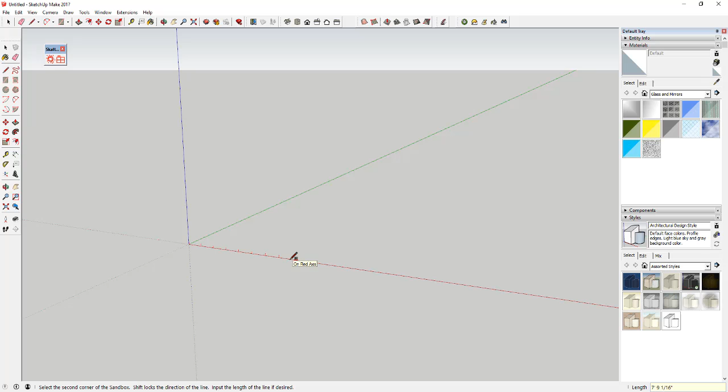So first we're going to use this From Scratch object to come in here and create a grid. I'm actually going to make this a 1 foot by 1 foot grid. You see how in the corner it says grid spacing? I'm going to type in 1 foot and hit enter. Then I'm going to click once, type in 30 feet and hit enter, then move my mouse this way and type in 30 feet again. So basically I came in here and created a 30 foot by 30 foot grid.

Now we're going to right click on this and explode it so that it's actually in here as individual lines and faces and stuff like that. So select this box, right click, and click explode. Now we can come in here and work with this.

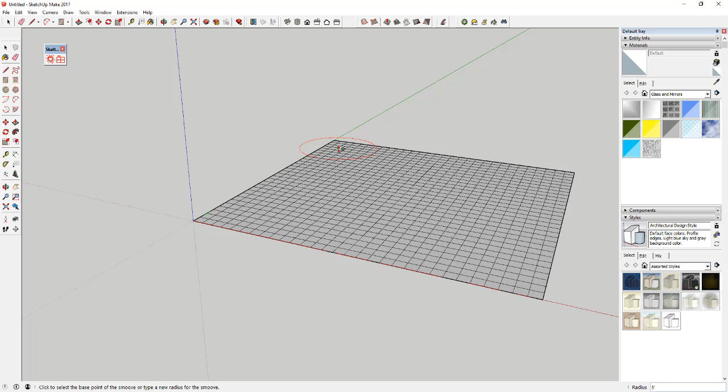The next thing we're going to do is use the smoove tool to come in here and kind of move this up and down. You can see how when I click on this smoove tool, I get this circle, and it's centered on wherever my cursor is, but it's a little big right now. Down here in the corner it says radius of 10 feet. I'm going to type in 5 feet and hit enter, and you can see how the size of this circle gets smaller. So now I can come in and work with this.

All I'm going to do is move some spaces up, some spaces down, creating kind of a landscape looking space. So we'll make some hills, some valleys, that kind of thing, just to make this a little bit of an interesting space. So now this is in here as more of an interesting type landscape, or type terrain.

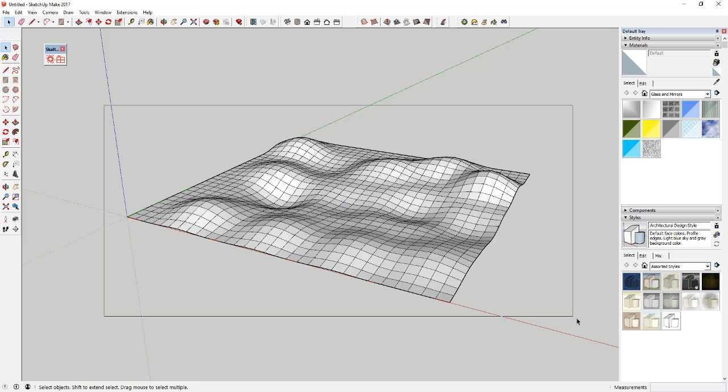So next thing we're going to do is come in here, and what we can do is we're actually going to smooth this. So to smooth this, you're going to select this whole thing, and there's going to be an option in here for Soften Edges in your tray.

If that does not show up in your tray, just come up here to Window, Default Tray, make sure Soften Edges is checked, and make sure that your tray is turned on.

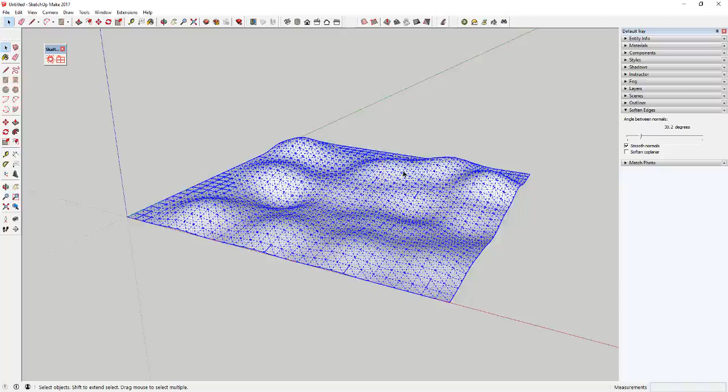Once we've got that, we're going to come in here and drag this little bar up a little bit, just like this. You can see what this does is it smooths this into a single face. If I was to triple click, you can see how it's still got all this geometry in here, but it's set as softened and smooth geometry right now.

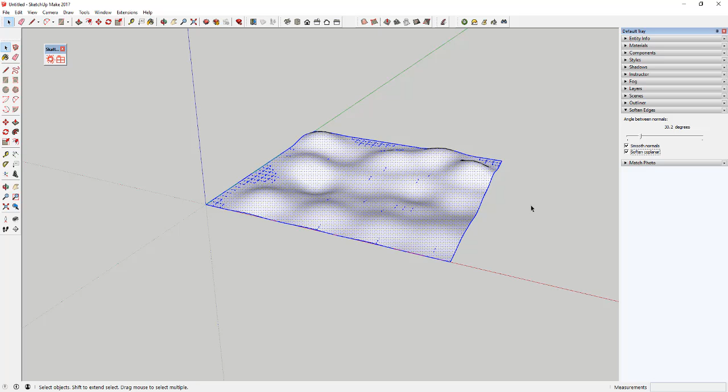So what we're trying to do is get this to be an individual face. I'm also going to check this box for Soften Coplanar. What that means is any of these lines that are on the same plane, just like this, it's going to bring them in as softened. So now I've got this general terrain shape in here.

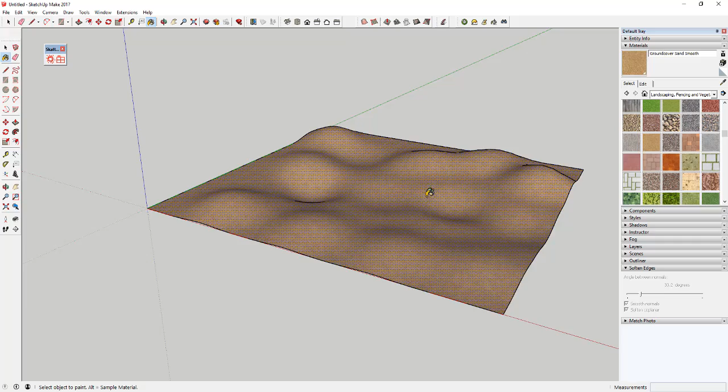The reason I did that is so I can come up to my materials and apply like a dirt material to it. For example, I'm going to come in here and select either a ground cover, like a sand, just like this. You can see how when I apply this, this becomes kind of a sandy face, just like this.

Or you could come in here and apply one of the vegetation options, like grass or whatever. There's a few other things you could do in here as well.

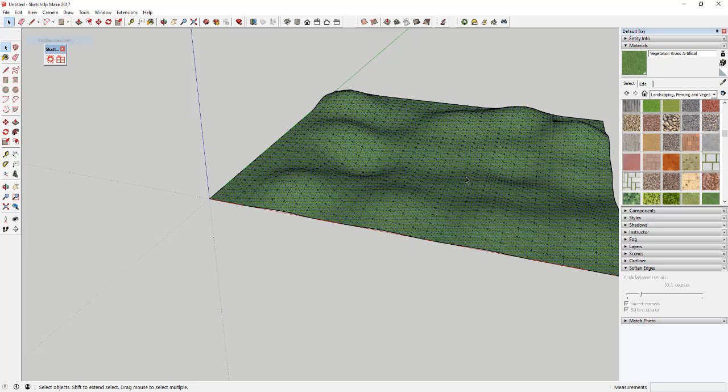For example, if you came in here and turned hidden geometry on, you could select like a path across this face, just like this, and then use an extension like Selection Toys so that you only have edges selected. Then you could come in here and unsoften those if you wanted to, and kind of mess with the geometry a little bit more.

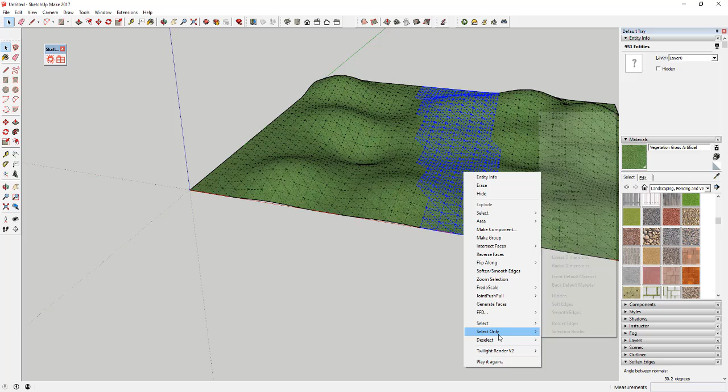You could also come in here, drag something across this and select only the faces, then put the faces in some kind of group. So if I was to come in here, select only faces, and then come up here to Edit and say Make Group - basically what I did is I kind of split this face into its own set of geometry in here. Now I can turn hidden geometry back off.

So if I needed to, I could come in here and say that I've got like a sandy bed that's running across this or something like that. There's a few other things you could do in here, but this is just kind of setting up what we're going to do with scatter.

So now I'm putting these in groups just so I can come in here and adjust each one of them the way that I want to. But what we're going to do now is start scattering stuff across this terrain.

There's a few different things you could do in here - like you could scatter grass or bushes or whatever. In this case, I'm going to go ahead and bring some grass in. Looks like I could update some stuff if I want to, but we're going to start off just very, very simple.

There's a whole bunch of options in here for scatter, and it can be a little intimidating, but we're just going to go real slow and walk through some general stuff. The first thing you're going to do is you've got this option in here for hosts, and hosts basically means where you're going to put your stuff.

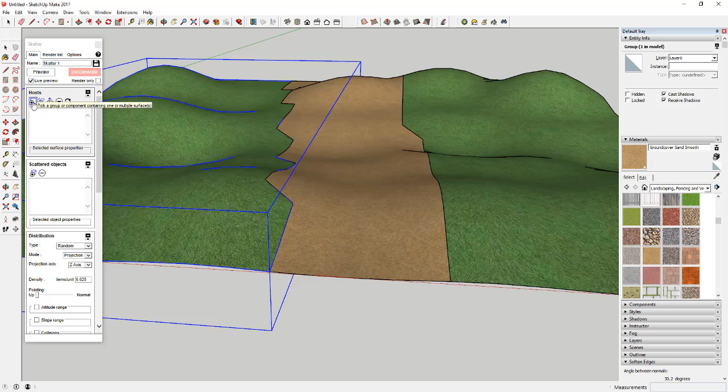So in this case, if I select this face, you've got a couple different options in here. You could pick like a curve, you could pick points, or you could come in here and pick a group surface, which is what we want in this case. So we're going to click on this, and it's going to ask us to click on a surface. You can see how when I move my mouse over this, these kind of shade - that's just basically telling us, okay, you can pick this if you want to by clicking on it.

So in this case, I'm going to click this left-hand side right here. That's kind of our first piece, so we've got a group selected over here. And then the next thing we need to do is tell it what objects to scatter in here. In this case, I'm just going to use some of the stuff in here as a default.

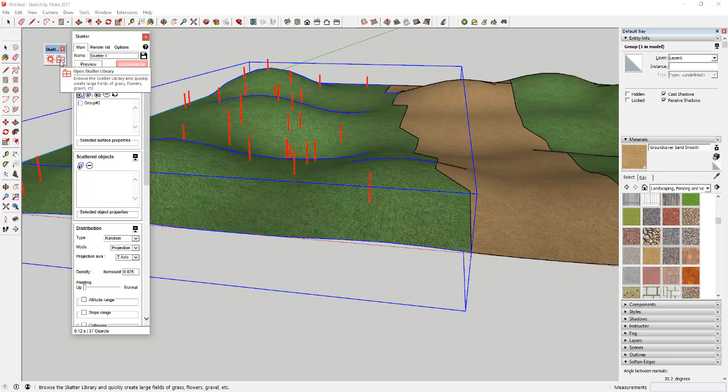So I'm going to tell it to open the scatter library. This is all kind of the built-in scatter library type stuff. You've got a few different kinds of grass, you've got some flowers, you've got some bushes, that kind of thing. In this case, we're going to select this short grass one, just like this.

There's two options in here: you can bring these in as proxies, or you can bring these in as full geometry. Proxies basically bring in these objects as super lightweight type geometry. At this point, since I'm using Twilight Render and I don't have the Pro version, I don't think proxies really make sense. I think full geometry is what I want.

But for now, what I want to do is make sure this render only box is checked. What this render only box means is right now it's not going to bring in all of the grass geometry, which is a big deal because the grass geometry in here has a whole bunch of polygons and it'll slow your model down really fast. So make sure this box is checked for now - we'll probably go in and change that later.

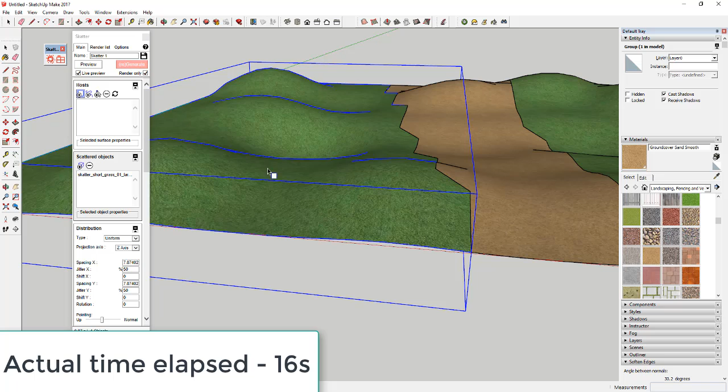But then we're going to come in here and just click load, and give it a minute to bring that in. So actually you can tell what that did is it kind of wiped out what I had in here before, and instead brought this in. It brought the object first, and now it's asking me to select a face.

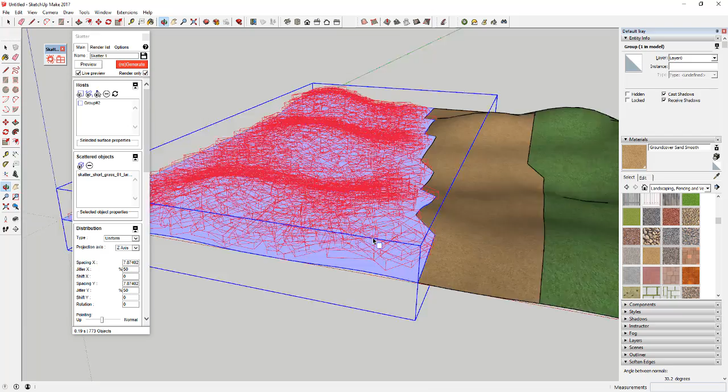So I just have to click on this face again. And then you can see what this does is now I've got all these red boxes in here, and basically the red boxes show you this is where it's bringing in - every one of these boxes is where it's spreading the little grass geometry piece just like this. So you can see how when I move my mouse around, there's a whole bunch of different objects in here, and you can see how it's bringing these in at different rotations as well. So it's not just making a grid of this grass object, it's kind of randomly rotating it and placing it on this face so that everything looks really organic in here.

So I kind of like the way that it brought it in. The one thing you can do if you want is come in here and adjust your spacing to adjust how many of these objects it brings in.

So if I was to tell this to do a spacing of like 10 instead of a spacing of 7, that means it's going to try to space this 10 times as opposed to 7 times across this face. So you can see if I came in here and typed in 5 for the spacing X and the spacing Y, it's going to give me a lot more of these objects. So you can kind of control the way that it brings those in, just like this.

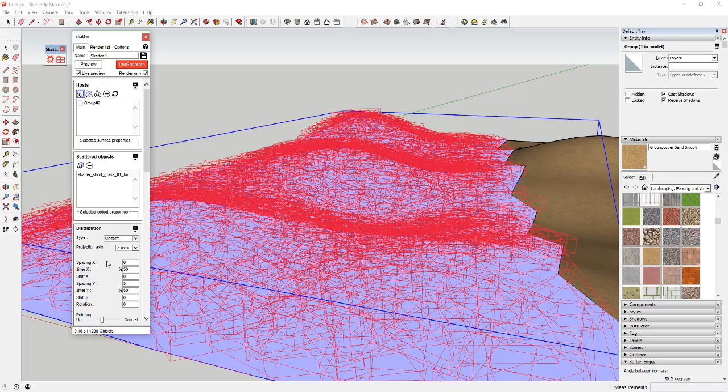So I'm going to bring these down, probably we'll call it 8, for right now, and kind of see what that brings in. You can see how it's still bringing in a bunch of these groups, but it's not bringing them in as full geometry quite yet, which is fine because that's really going to slow our model down.

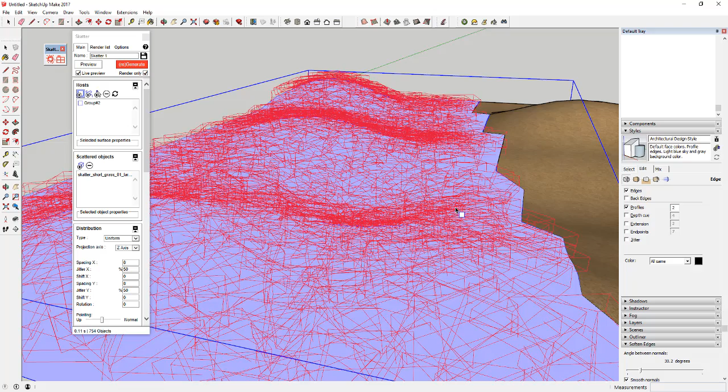So one other thing we're going to do is come in here and adjust our style real quick, because what happens is when SketchUp has to render a whole bunch of different lines and stuff, and we select the style - when you have profiles turned on, it means every one of your objects has kind of a thickened line on the edge of it, which is great right up until you bring in a big grass object that has a ton of geometry. Then all of a sudden it really starts slowing down your model.

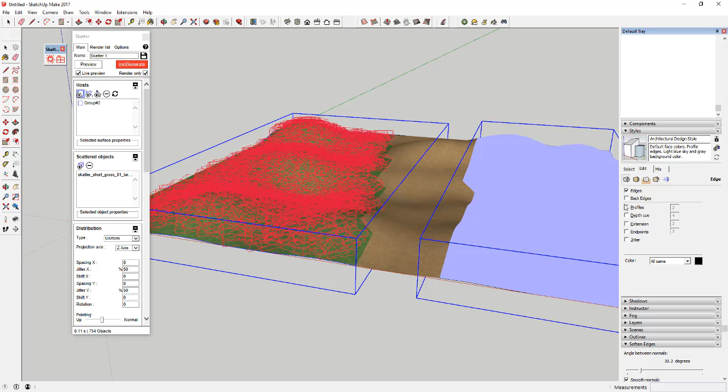So we're going to go ahead and uncheck this profiles box and click on this box to update the style with changes. That just means you're going to save that change in your architectural design style right here.

You can see how this is bringing this in on this hill right here. We're also going to click on this one. Now it's bringing both groups in here as hosts, and it's telling it to scatter this short grass object.

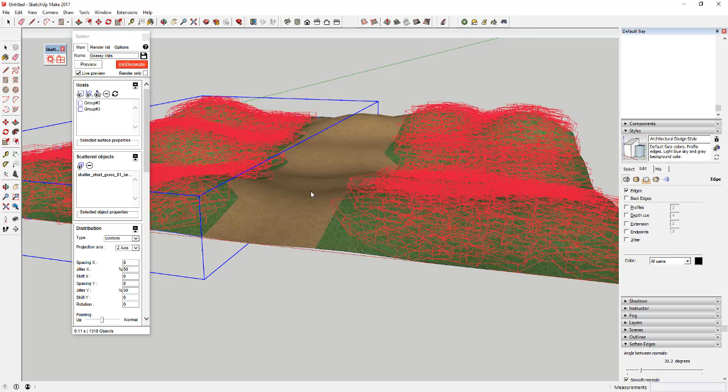Now we're going to come in here and actually generate the geometry. The way we're going to do that is we're going to uncheck this render only button, then come in here and click regenerate.

It's going to take a while, because if you look down here on the bottom, it says it's going to bring in 1,300 objects, and those objects all have different grass materials on the inside of them. So this is going to take a little while to do.

Really, anything like this, if you're scattering a whole bunch of geometry, it's going to take a while no matter what you do. That's why the render only option is so nice. If you have a V-Ray or the Pro version of Twilight Render, you could just click on the render button and start rendering without ever having to bring the real geometry in here. That's one of the big benefits of scatter.

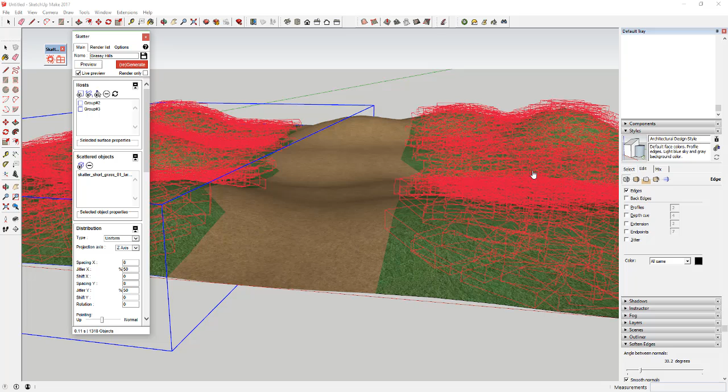Alright, there we go. So now if I come in here and take a look at this, you can see how it brought in all this grass material on here, and it kind of put it on top of this green piece right here.

There's a little bit of gap on the edges, just like this. So there is definitely that gap right now between the green and the road, but we're going to go ahead and roll with it for right now and see what else we can do.

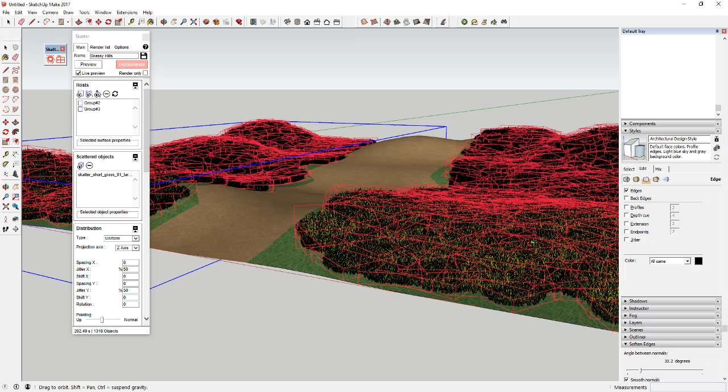So you can see how you bring all this in. It's got all the grass on your hills, and it is significantly slowing down my SketchUp model, which is why it's so important to be able to do this with a full-on rendering software, which unfortunately I do not have at this point. But you can see how I can kind of move around, navigate, and adjust the way this looks.

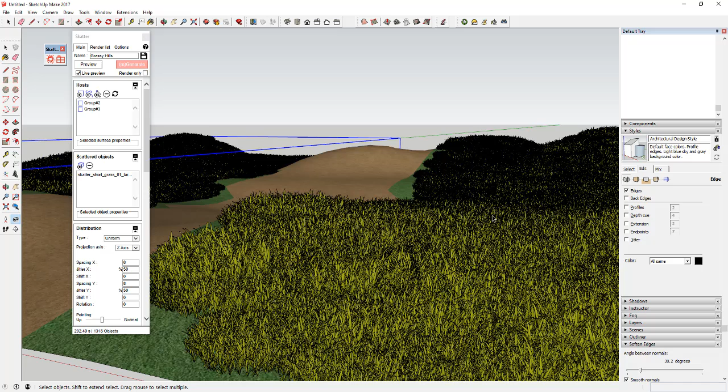So now what we want to do is come in here and add probably some bushes, some kind of random bushes in here.

Right now, in the newer version of this, this actually allows you to put stuff on a layer. And I just haven't downloaded and installed that yet.

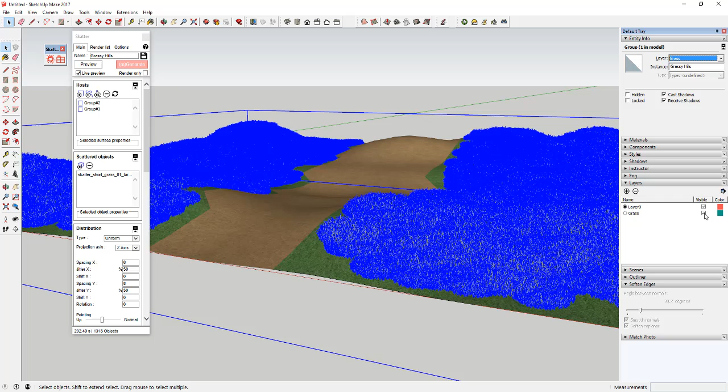For right now, what I'm going to do is just take this group and create a layer for it. I'm going to come over here to the layers section and call this grass. Then I'm going to select this object and select the grass layer, and uncheck visible right now. So basically I just turned that off, is all that I did.

So now I can kind of move around in this model really quickly.

Okay, so the next thing we're going to do is we're going to add a new render. We're just going to come over to render list and click the plus sign, and basically what we're going to do is scatter in some daisies into our grass.

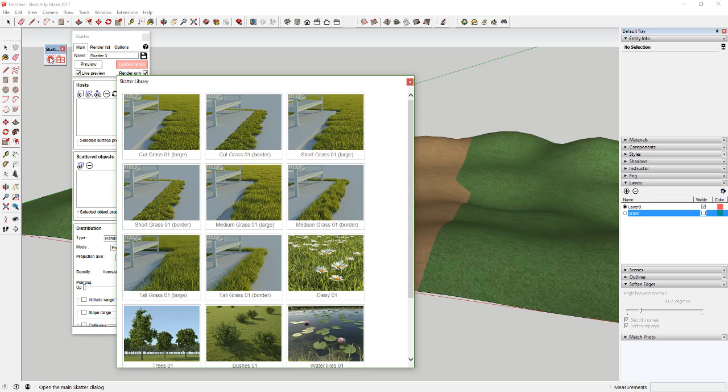You're just going to come over here to the open scatter library, click daisy, and click load. It's going to do the same thing - it's going to ask you to select a host.

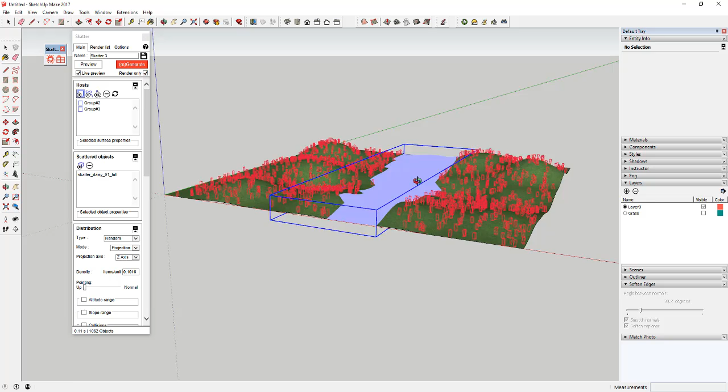So I'm going to click on this face, and click on this face. You can see how this brings all of these in, so you can see where each individual daisy would be, which is really kind of helpful. But the one thing I want to do is come in here and add a clipping area.

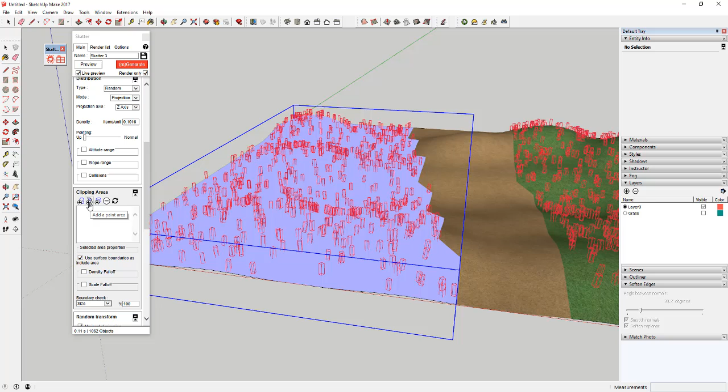So basically a clipping area is an area where you can tell it, I definitely do not want you to put stuff in this area, or you can say I do want you to put stuff in an area. We're going to come down to this object that says add a paint area and click on it, and that gives me this circle right here, which lets you set your brush radius. In this case my brush radius is 36, I'm going to take that down to 12, and see how that made my brush smaller.

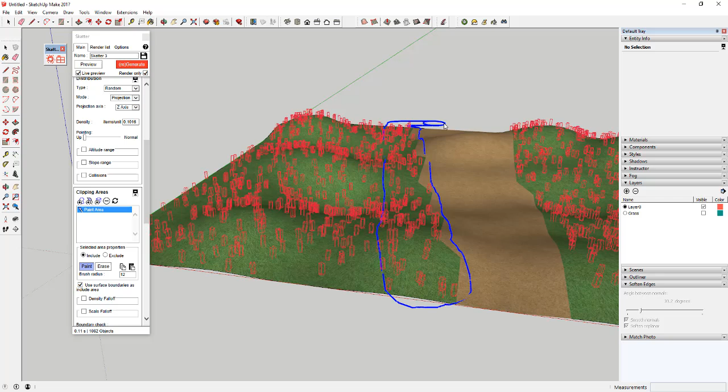I can click and drag along the edge of this road, just like this, setting an area where I'm telling it I don't want to put the daisies. I'm going to do the same thing down here as well, dragging along here. You can see how as you paint it kind of merges into itself, so if I want to widen this piece a little, it does that. Now I'm going to set this area and select exclude, and you can see how it comes in and removes all the daisies from inside this area.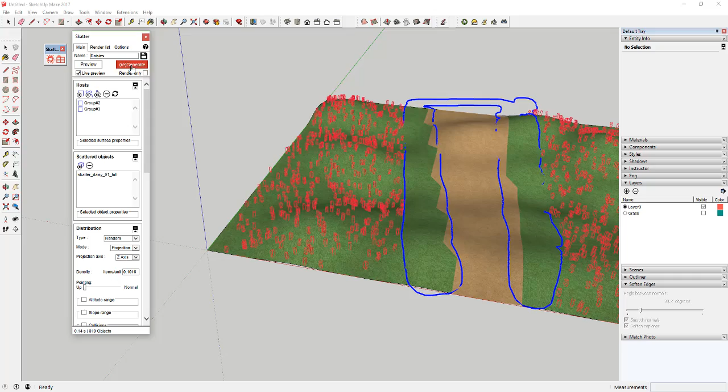Now I'm going to do the same thing, I'll call this daisies. I'm going to uncheck render only and click regenerate to see what geometry it generates. The nice thing is these are a lot smaller, there's not as much geometry, and it brings all these daisies in as their own group. If I click out of that, you can see these are in here as a group in my model.

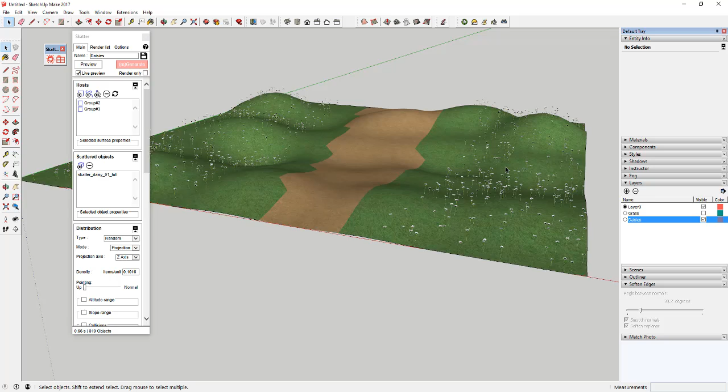So I can create another layer, call it daisies, and set this group on the daisies layer. Now I can turn those on and off. I'm going to turn my grass back on, just like this, and you can see how now I've got all this grass in here with these daisies as well.

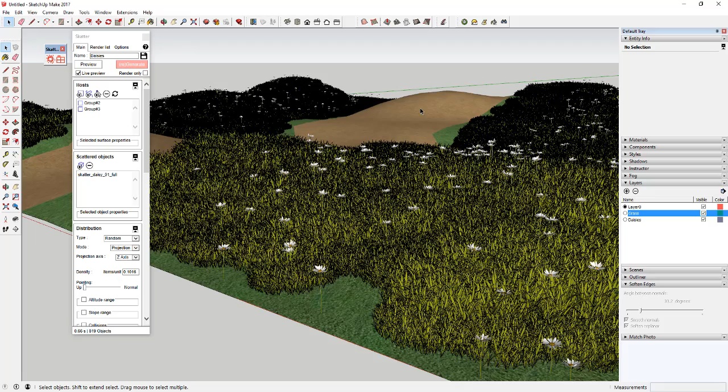Now I can take this and zoom in a little bit. Again, you can see why you wouldn't want to bring this geometry in, because it really slows your model down. I'm going to create a render in Twilight Render of this view, now that I've got everything filled in and ready to go. I've got my view set, and I'm going to go to View, Animation, and add a scene, in case I want to come back to this scene. I'm just going to do a quick preview render on the preliminary setting — with this much geometry you definitely want the most preliminary, lowest level render possible to check your settings.

I'm just going to let this run for a little while. All right, cool — so you can see how I've got my hills with the grass, and it's also got the daisies in here. I really like the way this turned out, so I'm probably going to get a little more in depth with it. One of the reasons you do a test render like this is to make sure everything shows up properly.

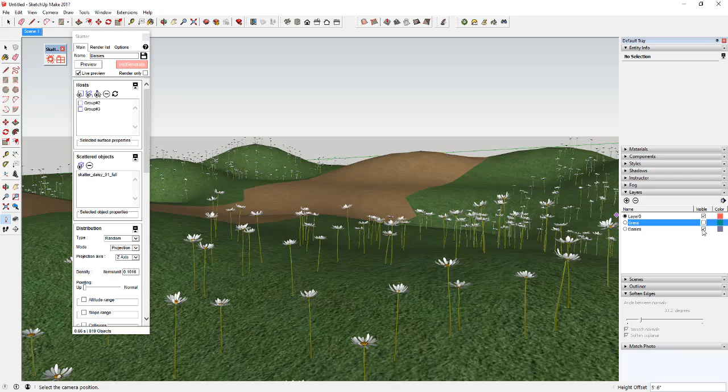You can see how some of this green still shows up on the edges here, so I'm probably going to take these two pieces of geometry along the edges and turn them to the same color. You could also come in and add a couple other things, probably some trees or something like that. I'm going to turn my grass back off, which will let me work in here a lot faster, and I'm going to change the material of these two pieces over here — I may have to go inside the group to do that.

That way I don't have this little gap right along here where my grass was. So I'm going to go ahead and change that, and I'm also going to come in here and add a couple trees.

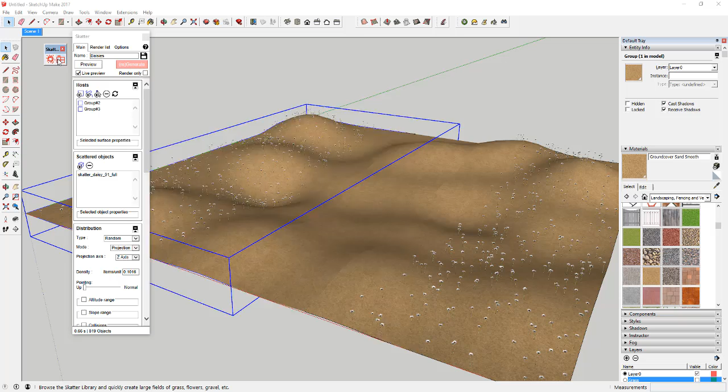Scatter has trees in its library as well, so I'm just going to click on the folder, click trees, say full geometry again, and click load.

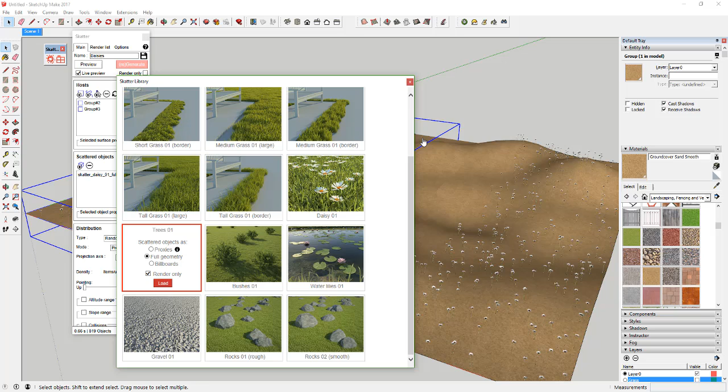That's going to bring a couple trees in over here, and it'll probably ask me again for another host to click on. So I'll click once on here, and you can see how if I look at this box, the tree is going to come in way too big. This is showing you the size it's going to bring this in at.

So what I'm going to do first is adjust the scale down here at the bottom. I'll bring this scale down to probably 25%, and set the max scale to probably 35%. This is going to randomize the scale between 25 and 35%, so your trees don't all look the same.

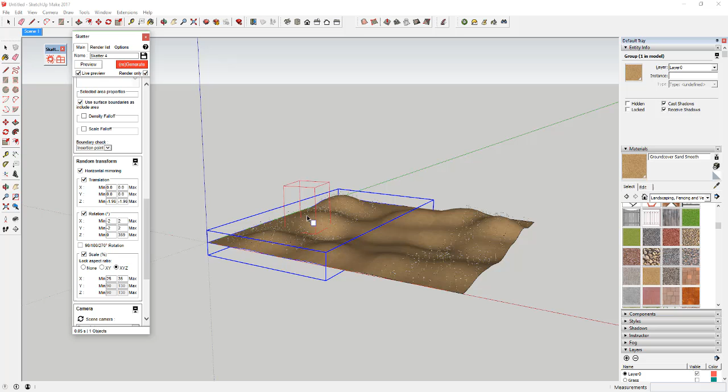You can see it's only bringing in one box right now. I'm going to change this spacing to something more like 100 on the X and on the Y instead of 300. Even that's probably not exactly what we're looking for, so we'll bring this up to about 200 and 200. That'll probably bring in a couple trees.

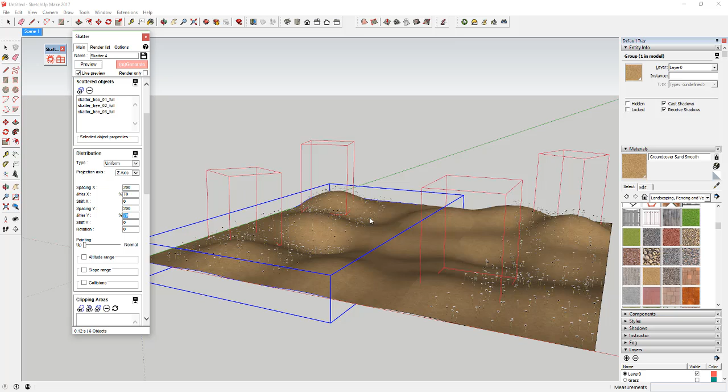We'll also click over here to bring in a couple trees on this face as well. So you can see by these boxes it's basically going to bring 4 trees in. I'm going to uncheck render only, click regenerate, and that's going to bring in those trees right here. Now I'll click out of it, and it'll bring those in on a group.

I'm going to create a layer for the trees as well, and put those on the tree layer. Now I can turn my trees on and off.

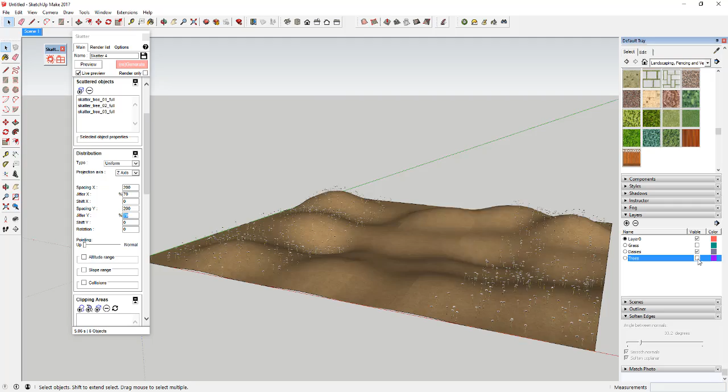So now I can come in here, set up my view like this, and figure out the way that I want it to go before I turn that grass on. You can leave the daisies on and leave the trees on, and this works pretty well. The grass is really what's killing you from a geometry standpoint.

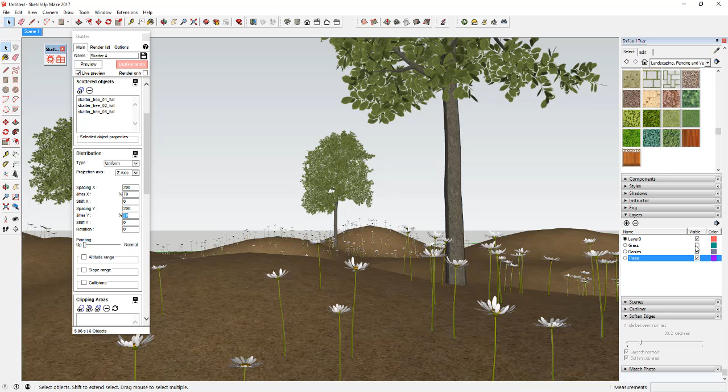Now I'm going to come in here and get a little bit lower, and turn my grass back on. Probably what I'll end up doing is another test render, but then I'm just going to render this at that higher style. I may put a new sky in my rendering software and stuff like that, just to make it look more realistic.